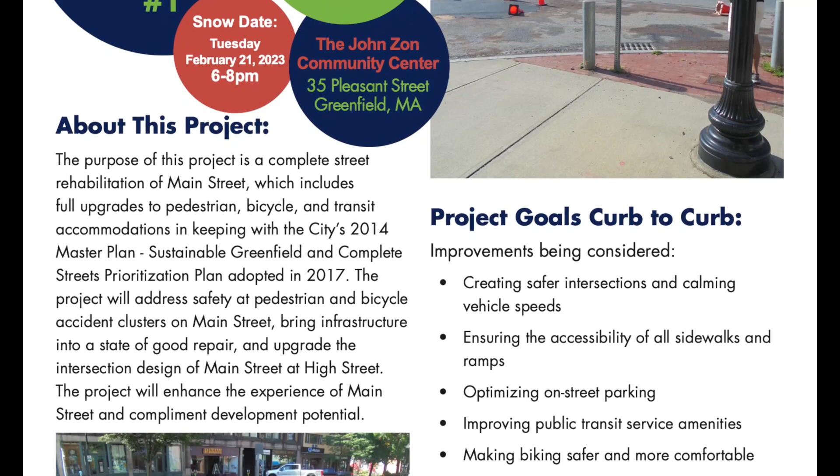I think that was my cue to come on and welcome everyone. Due to circumstances completely beyond my control, I'm not able to be there with you tonight, and I regret that a great deal. I'm excited about this Main Street redesign.

It is intended to enhance downtown Greenfield in many ways. It's part of the total picture of our downtown revitalization. The good news is, and I want to welcome Fuss and O'Neill tonight because they'll be doing their presentation where you will be able to learn more about something that you've been hearing a lot about off and on for the last couple of years. They're ready tonight to give you the information that I think we've all been waiting to hear.

Fuss and O'Neill is working on behalf of the city and Mass DOT. This project is fully funded with Mass DOT. The city had to put in a couple hundred thousand dollars to get us to the design and engineering stage. The rest of it, which is a multi-million-dollar project, will be funded by Mass DOT.

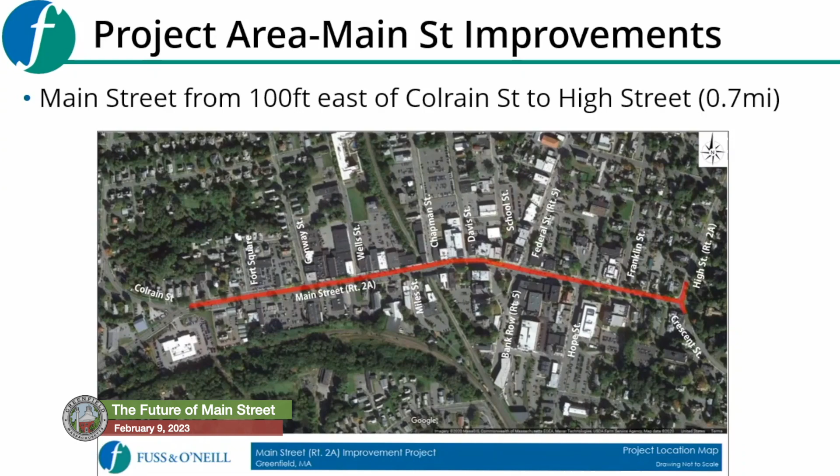So let's start with what area we're talking about and the project limits. This project is on Main Street, starting 100 feet east of Colrain Street and continuing 0.7 miles to the High Street intersection. As far as cross streets go, it extends about 50 feet to each side of Main Street. It's a really linear project. What we're discussing is mainly what's happening between the curbs, but we'll also talk about fixing sidewalks and wheelchair ramps where they're deficient or not accessible. Primarily, this is a presentation about the transportation design of Main Street between the curbs.

We're going to have questions and take your comments after the presentation. Do you have a quick question?

Sure, what you said about the side streets and 50 feet. The project is primarily along Main Street, but there are 14 intersections between Colrain Street and High Street. The project won't go very far down any of those side streets, only about 50 feet, so it will take care of the intersections but not extend too far down the streets north and south of Main Street.

Okay, so let's start with the project summary. What is the project purpose and need? This is something we had to explain to MassDOT when we initiated the project with the city. I've got six points. The first one is we want to rehabilitate Main Street into a complete street, and we'll delve more into what a complete street means in just a moment.

The project will address, most importantly to MassDOT and of course to the city of Greenfield, safety. Also, we want to bring infrastructure into a good state of repair—that's the pavement and sidewalks. We want to make it new.

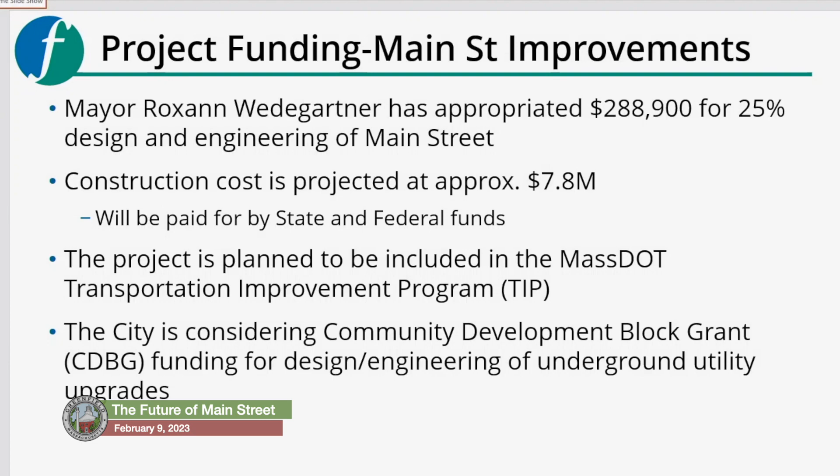The project is planned to be included in what MassDOT calls their Transportation Improvement Program. Right now, construction is at the earliest projected to happen at the end of 2026, if all goes well. And the city, as I mentioned, is considering additional utility upgrades. The engineering design for those additional utility upgrades would be paid for by a community development block grant, at the city's option. So just a little bit about project funding.

I want to talk about project schedule. We're, of course, here tonight at the first public workshop. The next step in this process will be that our team will take your opinions and statements, and fold that into the design work we're doing, and develop 10% concepts. Then we will present those 10% concepts back to you at a second public workshop.

That's scheduled to take place approximately June of this year. And then after that second meeting, where the public has had a chance to see the alternatives and comment on the actual 10% design, we'll then delve into our 25% design process for MassDOT. Our contract currently ends when we submit the 25% design plans to MassDOT, currently scheduled for the fall of this year.

Okay, now I'm going to get into existing conditions and key issues. I'll try to go quickly. I know many of you are familiar with Main Street, but we're going to talk about key issues in three topics: vehicles, cyclists, and pedestrians. So let's start with vehicles, I believe.

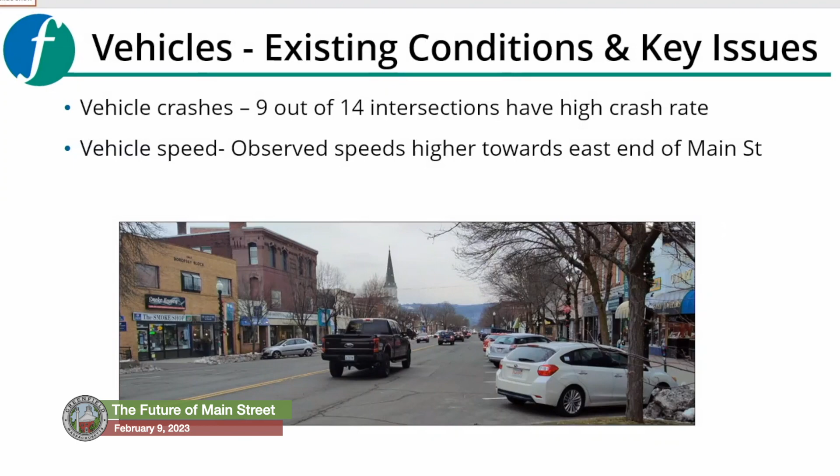Okay, so first and foremost, existing conditions. There is a safety issue on Main Street. We found that of the 14 intersections in our project area on Main Street, 9 of those intersections have a higher than average crash rate compared to the state average for unsignalized intersections, with, of course, the exception of Federal Street and Main Street. So over half the intersections in the project area have a higher than average crash rate.

Vehicle speed, we did notice that there is a speeding condition towards the east end of the project near Franklin Street and High Street. As you know, most of Main Street in this project area is 25 miles per hour. As you move east towards Franklin Street and High Street, it lowers to 20 miles per hour. We had speed observations collected, and we're seeing about 7 miles per hour over the speed limit, Franklin Street and east, which was a bit of a concern.

I want to introduce the concept of what MassDOT calls crash clusters. These are statistical areas where there's a high incidence of crashes, and MassDOT actually publishes these to inform cities to take action and think about making things safer. It turns out that there is a pretty big one in the middle of our project area. This is statistics from 2010 to 2019.

We have a top 5% pedestrian and bike crash cluster for Franklin County. And when I say a pedestrian and bike crash cluster, that means vehicles have struck pedestrians and bicyclists. So this is one of the reasons why MassDOT is eager to help bring this project off the ground. Their primary concern is safety, and when they see a cluster like this, they're eager to help a design project rehabilitate the facility.

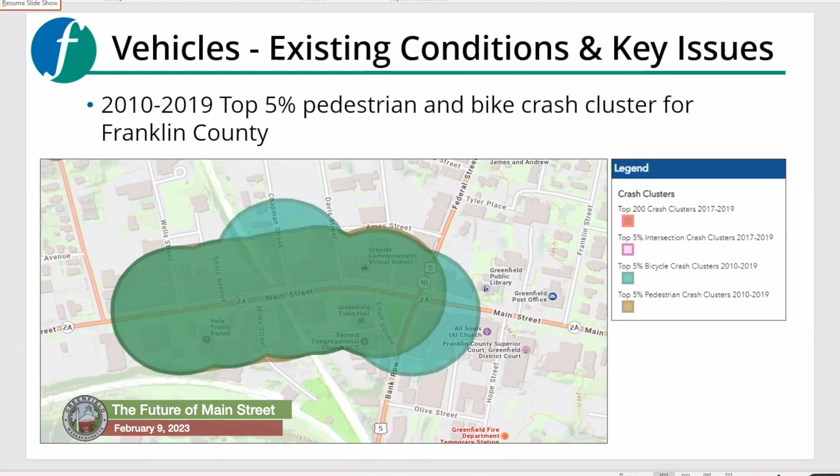Now, I want to mention another existing conditions issue. I know it's a hot button issue in town. I want to underscore something Arnold said earlier, which is that we're here tonight to listen to the public. We haven't designed the project yet, but we do want to talk about the issue of angled parking. And I just want to bring up two downsides of angled parking.

The first is that drivers have difficulty seeing bicyclists behind them when they're parked angled towards the curb. The second is that when you angle parking, you need more road width to fit the cars. So you're allocating more space to vehicles when you park at an angle in the roadway. And as you know, this is a street that likely can't be widened, so space is very important in between the curbs. So that's an existing condition.

There are no striped bike lanes on Main Street, and it makes an uncomfortable environment for cyclists to use. I'd even say Main Street is a little bit intimidating if you're not an experienced cyclist. So this project is going to try to address that issue and make Main Street more comfortable for bicyclists.

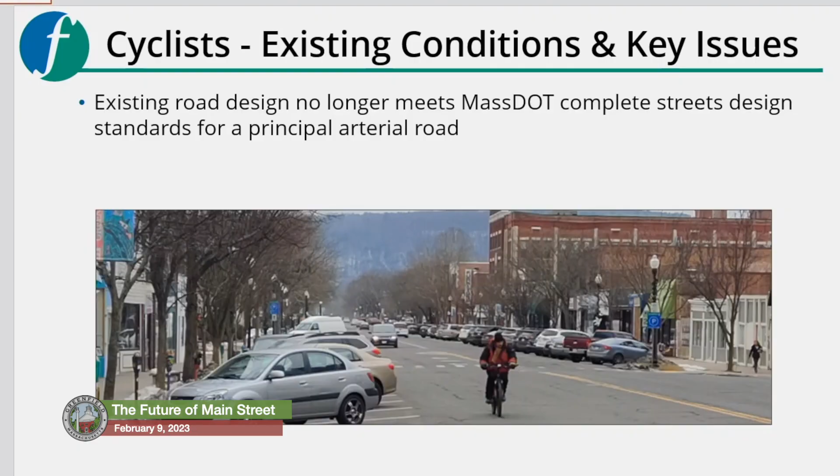The existing cross-section of Main Street has angled parking, two vehicular lanes, and no bike lanes currently. It's now obsolete as far as MassDOT is concerned as a road design. So unfortunately, to put the exact same design back the way it is with this project would probably not be accepted as a design alternative to MassDOT if they're funding it.

Next, I want to hit on a few existing conditions for pedestrians. As we saw with the crash cluster, including pedestrians, we have a safety issue existing on Main Street. That safety issue is most likely related to visibility.

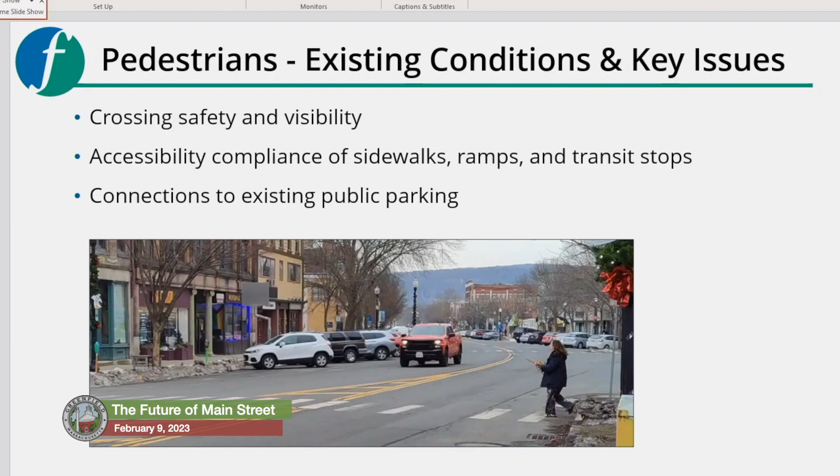We want to make sure that sidewalks and sidewalk ramps are compliant with the Americans with Disabilities Act. We haven't done a formal accounting, but I'd say it's probably 50-50 - about half the ramps in the project area are okay, and half are not compliant with accessibility standards at the moment. We also want to make sure there are clear connections for people who want to park off Main Street and walk.

Project goals - these are connected project goals in three areas: vehicles, cyclists, and pedestrians. We'll talk about those in more detail. Next slide.

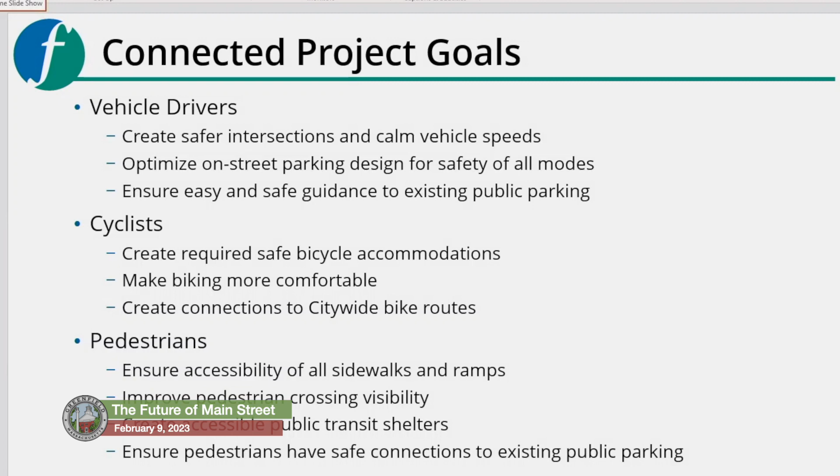When I talk about the goals, we haven't designed the project yet. We're waiting to hear public input, but we do have goals, and these come from what MassDOT is encouraging us to envision. So we'll start with vehicle goals.

We want to create safer intersections and calm vehicle traffic and speeds. We want to optimize on-street parking for the safety of all modes - make parking available and share road space with bicyclists as well. And we want to ensure safe guidance for vehicle drivers to understand where they can easily park off of Main Street, typically done through clear guide signage.

Project goals for cyclists: we want to create required safe bicycle accommodations - and when I say required, I'm talking about MassDOT design requirements. For a road of over 10,000 vehicles per day, it's required to accommodate bicycles per MassDOT standard. We want to make biking more comfortable and connect Main Street to other citywide bike routes.

Lastly, project goals and aspirations for pedestrians: we want to ensure accessibility of sidewalks and ramps is totally compliant in the project area. We want to improve crossing visibility, and we want to create transit shelters - there's currently a lack of them on Main Street. We want to make sure people using the bus have a shelter and an accessible way to get to it, and that people who park off Main Street have a safe path to walk.

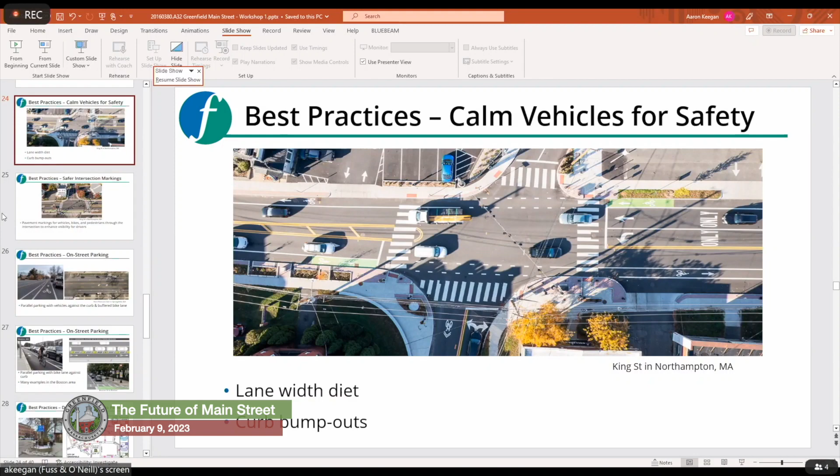All right, just a few more slides - thank you for hanging with me here. We want to get into best practices. Again, I want to emphasize we haven't designed yet - these are best practices we've seen in other projects. We're still open to other suggestions, but we're going to run through a few examples we'd like to share with you. First is best practices for vehicle calming and safety.

This is a project recently completed in Northampton on King Street. You can see there are clear pavement markings for bicycles, pedestrians, and vehicles. The lanes have been right-sized to still allow trucks, but they're no wider than they need to be to share space with bicycles. You can also see a curb bump-out in this picture - I know in Greenfield you're already familiar with what that is. But it's an important design element to narrow the road a bit, because we've noticed that when roads are wide, people tend to speed.

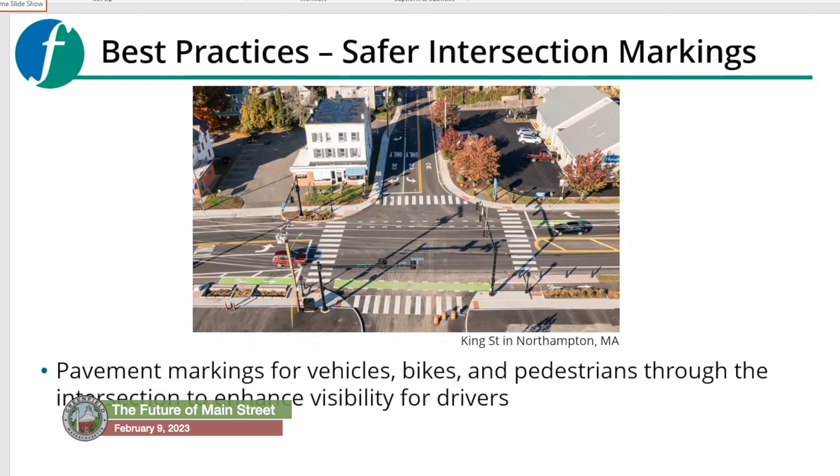Okay, so safe intersection markings. I just want to point out that we have a green bike lane that goes through the intersection. It tells both the bicyclist and the drivers how the bikes actually are getting through the intersection, and it just makes the space more clear and visible.

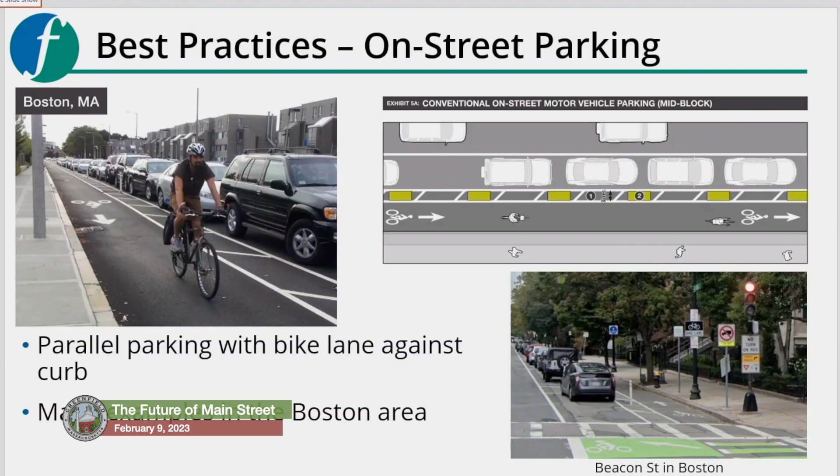Okay, this is another configuration - actually MassDOT's preferred configuration for a road with over 10,000 vehicles. We haven't designed it yet, but we want to make sure you're seeing the latest and greatest. This is a bike lane against the curb, frequently being built all over the Boston area and other parts of the Commonwealth. You have a bike lane against the curb, a 2 to 3 foot space, and then parking parallel next to the travel lane. It's a little different and takes some getting used to, but this provides the highest level of comfort and safety for bicyclists. So, an example for you to consider.

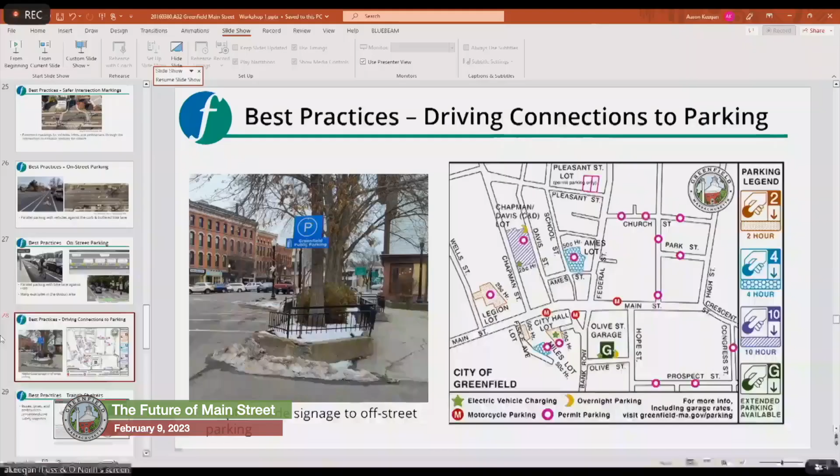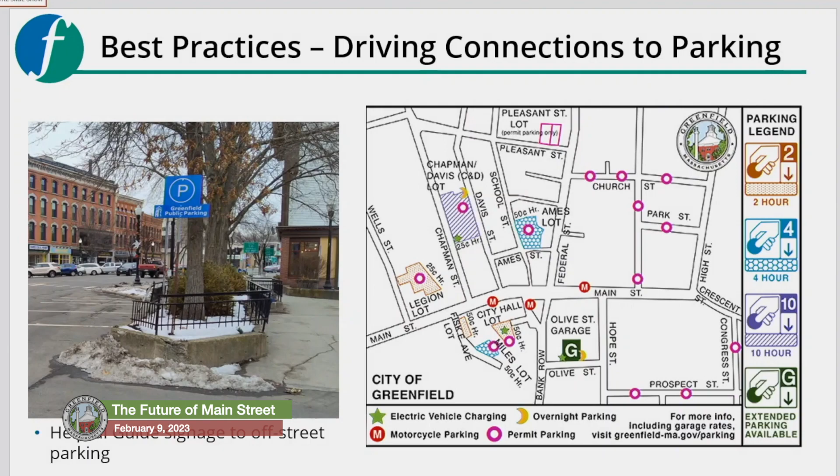Last best practices regarding vehicles, this is regarding parking. We already mentioned guide signage, which is primarily the best practice to inform drivers how to safely and quickly get to parking off Main Street. There are other ways to do it besides signage. Going on a small tangent, there are apps now where cities will have an app that guides people to available parking just off Main Street. I'm not saying that will necessarily be part of this project, but in addition to signs, there's other technology that can be used to improve the parking experience off Main Street.

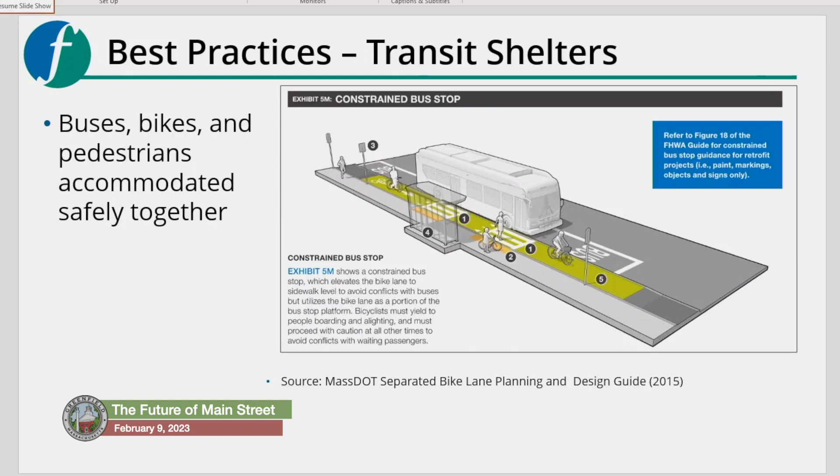And this is my last slide, I believe. The next one is just showing an example of a best practice for a transit shelter. Today's best practice transit shelters accommodate all three of buses, bikes, and pedestrians. The picture here is just one way to do it, but it's something that we think would be a big upgrade to Main Street.

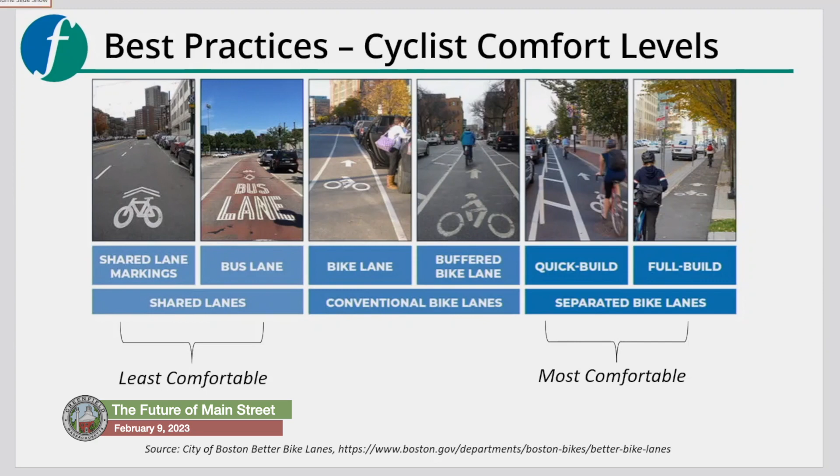On the right are what are considered the most comfortable and safest options - separated bike lanes. They take a buffered bike lane to the next level of safety by providing a vertical element of separation. That could be a vertical flexible post, maybe a raised island separating the bike lane and the vehicle lane, or even, as in the picture on the right, the bike lane is raised to sidewalk level, so the bikes are separated by the curb from vehicles.

The separated bike lanes are safer for bikes and pedestrians, but they're also safer for vehicles, because when those facilities exist, drivers know where to expect the bicycles, so they're not worried about conflicting with them in their vehicle lanes. Separated or buffered bike lanes are required by Mass DOT for their design approval, and because they're funding the construction, those would be required.

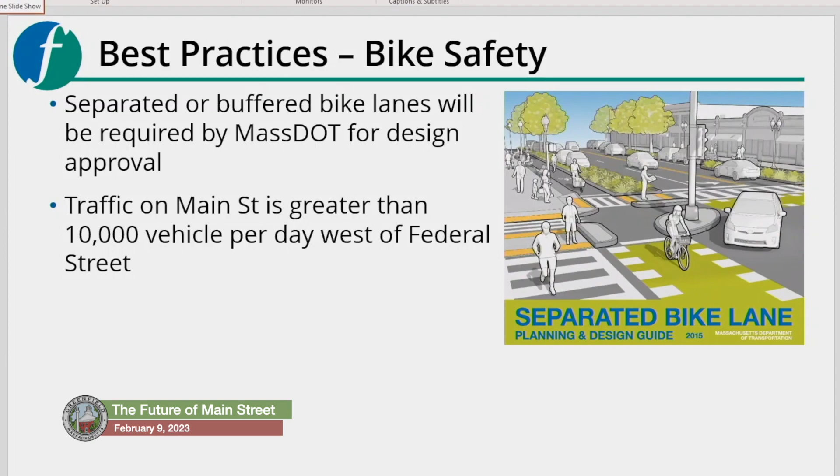That is based on the traffic volumes expected on Main Street. So we did do some data collection and found out that there are more than 10,000 vehicles per day on Main Street, which is the threshold set by Mass DOT.

There has been significant safety research showing that separated and protected bike lanes lead to fewer fatalities and just overall better road safety. And like I said, that's not just for cyclists, that's also for drivers and pedestrians.

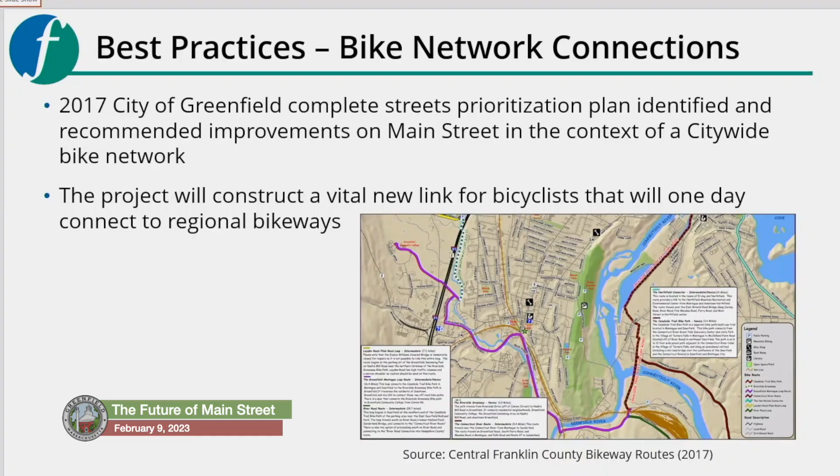So the goal of improving bike infrastructure is really part of a bigger city vision. In 2017, the city of Greenfield completed their Complete Streets Prioritization Plan. This identified and recommended improvements throughout the city, specifically on Main Street in the context of creating a citywide bike network, and creating these connections will improve regional connection to regional bikeways and also improve economic development.

So that's all I had. I'm going to hand it over to Chelsea Zakis, who is our planner.

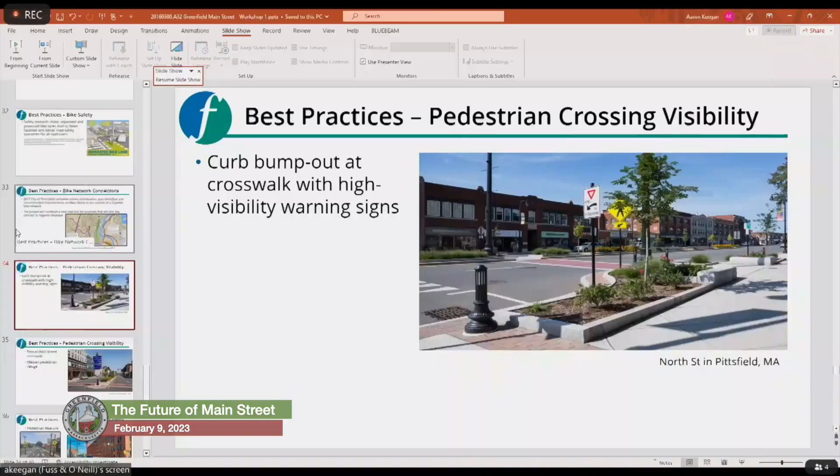Hello, everybody. So keeping in with best practices and examples from local neighboring communities, when we consider design for pedestrians, we are thinking first and foremost about visibility, and that is making the person visible to drivers. That can be done in many ways.

This is an example from Pittsfield. Several visibility measures going on here. We've got signage that is pointing down to the crosswalk. It's bright, it's reflective, it's telling a driver there is a pedestrian here, this is a crosswalk, be on the lookout.

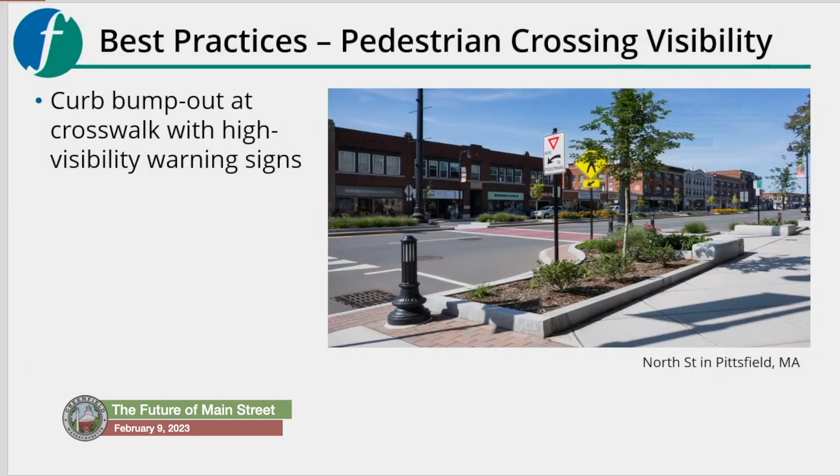And then also, mentioned before, the curb bump outs. Right in front of the parking spot in the lower left, you'll see the curb line dips out. It's called a bump out. What this does for pedestrians is it brings the pedestrian out from behind a parked car and into visibility of the driver. It also creates a shorter distance of travel from one side to the other, which is shorter distance, less time to be exposed to vehicular traffic.

Next, please. More on visibility. This is, again, an example from Pittsfield. We have got this crosswalk in the foreground that is bright red. It's bound by thick white lines, very bold, and it is also a different texture from the rest of the road surface. This really stands out to oncoming traffic vehicles. They see it.

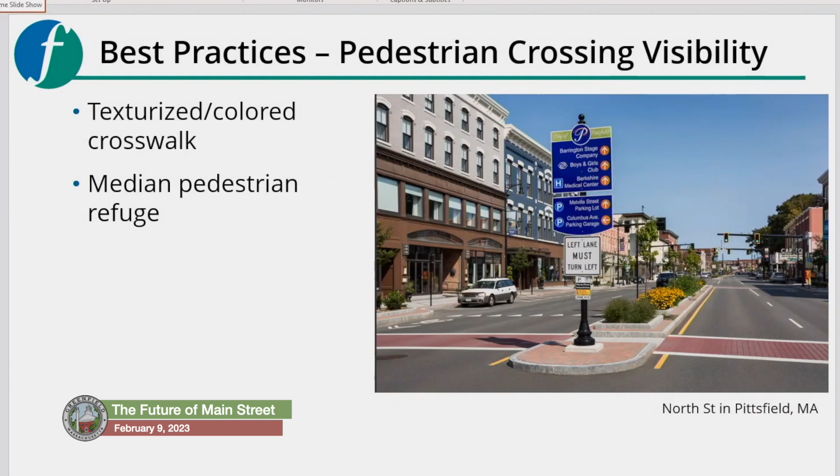That makes it very clear that this is a crosswalk. Be on the lookout for a person. And then in the center, this is a median pedestrian refuge or pedestrian island. This is great for wide roads or multi-lane roads. What this does for the pedestrian is it gives the pedestrian time to focus on where they're walking, looking to traffic coming from one direction first, stop in the middle, and then they get to look at traffic coming from the other way instead of left, right. They get to focus on one at a time, which is a safer situation. And then also, similar to the curb bump out, it is going to shorten the distance, shorten the time that a person is crossing, and that's less exposure to the vehicle.

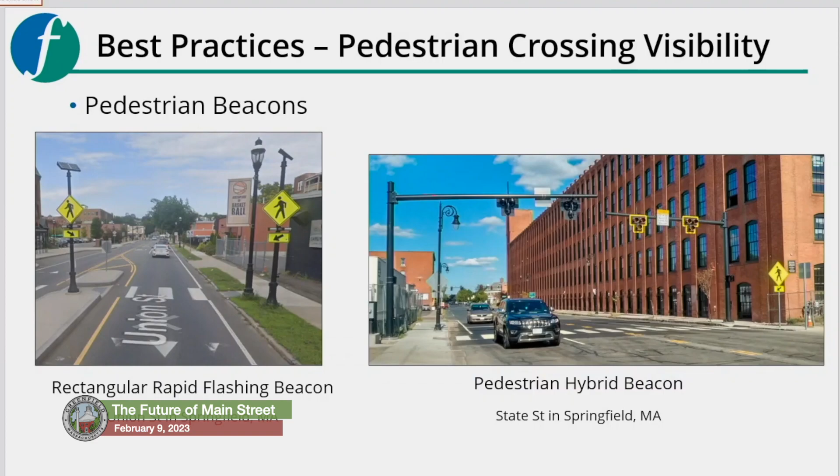Then we have two examples here of pedestrian beacons, the flashing lights. Pedestrian beacons are added safety measures where a painted crossing and or signage might not be adequate alone. The pedestrian flashing beacon, both of these examples, they're activated by a button, and it makes the driver more aware. It enhances awareness that a pedestrian is present right now at this crossing.

Then another best practice is related to connectivity. Creating network connections between destinations for pedestrians. So rather than having some pedestrian connectivity over here and here, creating a seamless network between destinations for pedestrians to get to and from. And then noted again that the city did call out Main Street for pedestrian connectivity in the Complete Streets Prioritization Plan back in 2017.

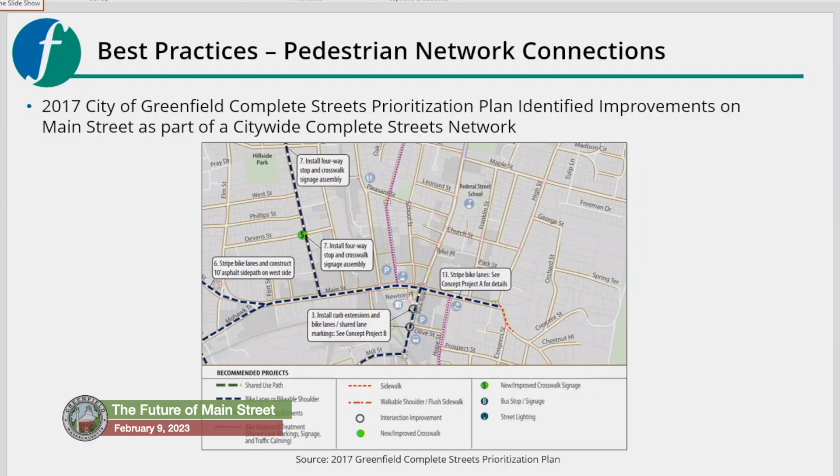And with that, I'm going to hand it off to Arnold, who's going to talk about our next steps.

All that stands between us and the chaos of getting to express all opinions and really go to work at the tables. We're a little bit ahead of schedule, which is great. I'm going to give you the instructions for working at the station. You won't have to remember all of this—you'll have people at each station to work with you and talk with you. But I want to lay out some guidelines for how we work together at those stations and how we capture ideas efficiently.

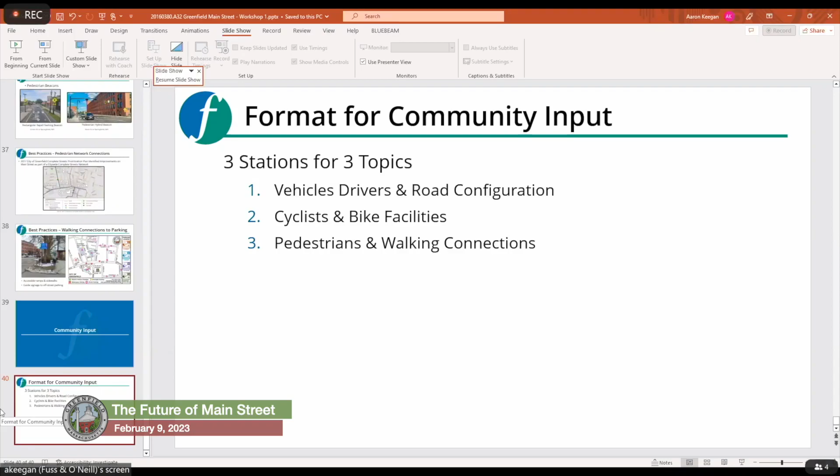At each station—I'll use the vehicular one right up there on the right-hand side—there are two blank pieces of paper, and each station has the same thing. We phrase the questions this way because we'd love your feedback. First: what is a positive thing out there on Main Street that you want to retain and enhance? It could be street trees, a particular section of sidewalk that's the right width, whatever. That's the first question—what is positive that should be retained? We don't want to start with the assumption that everything is faulty and needs to be replaced. We want to hear what you value.

But the second question is, what's a negative that should be improved or changed? So if there's a crossing distance across Main Street at a particular block that's too long or not well signaled, that's what we want to hear about. We want you to say the crossing at Chapman Street is too wide and you can't make it across safely, or the sight lines are bad. We're happy if you just list the negative—if you just say that crossing is too wide, that's okay. But if you've got an idea for solving it, we want to hear that too. That's part of our job as well, to come up with solutions, but we want to capture those ideas.

The other thing is, we show you these best practices not because we have a thought as to what the design's going to be, but we want to get you thinking tonight about things you react to and say, that would be great to have on Main Street in Greenfield, or never in my town, I don't want to see that.

We show you those to get the discussion going. Feel free to write down things you reacted to, positively or negatively. We want to capture those ideas as well.

One thing that will happen is as you go to a station, the first person may write something down. I'm going to use a silly example of sidewalks being purple, because hopefully no one's going to say that. If you see that idea already up on the board, you're welcome to write another Post-it saying sidewalks are purple. But if you don't want to waste your time and you just like the idea, you can put a check mark on that Post-it that says 'I second that, that's a great idea, let's do that.' Either way is okay with us, but we want to capture each individual idea as well as a sense of your priority. If I get 40 people saying purple sidewalks, then that's probably part of the project.